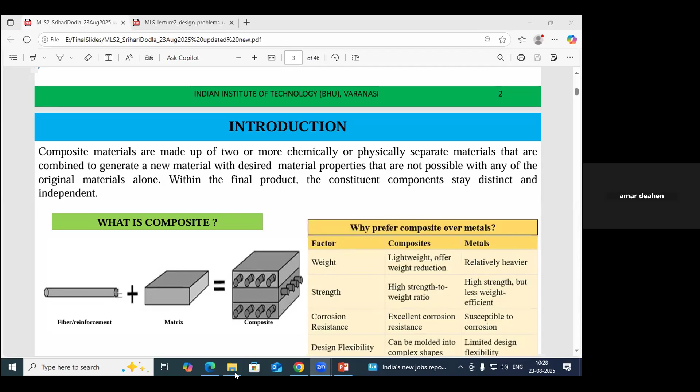Similarly, you can take the hardener, and for the container you can set it to 0 weight, and then you can add 12 grams. You can keep it aside. Now, knowing how much percentage of CNT you want to add, 0.25 percent, that is coming to 0.33 grams. You can measure 0.33 grams in the weighing machine and add it to the epoxy resin slowly. And then once you get a uniform mixture, after 2 to 3 minutes, you can add the hardener.

Once you add the hardener, stir it for a certain time, and then you can keep it on a flat surface with something like a plastic sheet, and to make sure it does not adhere to the plastic sheet, you can apply a silicone gel coating, and then you can pour your mixed resin onto that, and then check whether there is any kind of bubble formation or void. You can remove them by keeping it in the furnace, or you can also remove the bubbles with the help of some kind of sharp tool, like a pin.

So once it is cured after 24 hours, now you are ready with the composite material. You can cut this composite material as per the ASTM standards of the different testing experiments. Let's say for the tensile test, you can cut a sample of length 120 millimeters, width of 12 millimeters and thickness 4-5 millimeters. And then you can use that sample for the mechanical testing.

Similarly, for the other tests, 3-point bend test, interlaminar shear strength and impact test, there are separate dimensions as per the standard. You can cut the sample and then you can straight away test it.

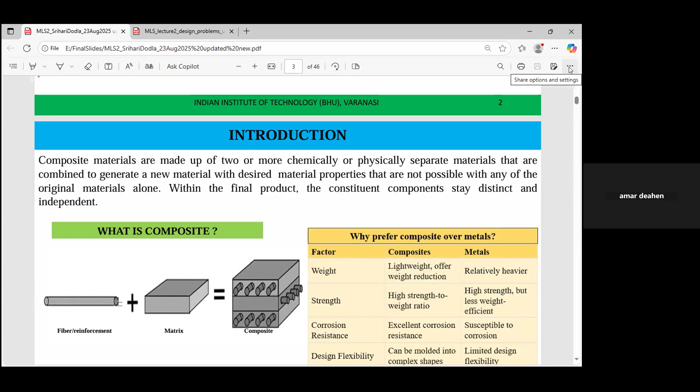Let's say, when we are preparing some food item like poha or khichdi, you have different ingredients in that. You cannot call that a composite material, right? Because microscopically it has to mix with proper distribution. There should be compatibility between the fiber and the matrix, so that you can call it a composite material.

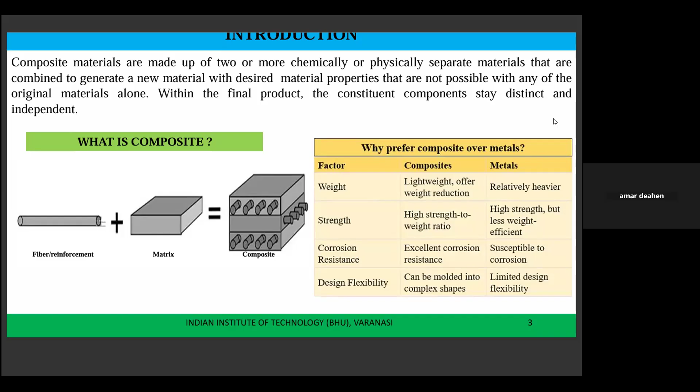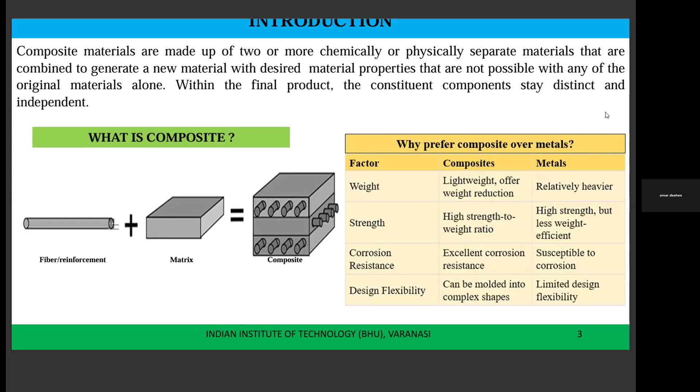So in this particular figure, you have a unidirectional fiber, and you also have a matrix. Say we want a certain volume fraction, 50% fiber fraction. We can keep it layer by layer, and we have to see, for adding one layer, what should be the fraction of the fiber. You can use the burn-off method to evaporate the epoxy, and then you get the fiber. From that, you can measure the weight. So you can increase the layers and see how many layers are required to get that particular thickness, 4 mm, 5 mm.

So in that way, you can increase the volume fraction for the fiber case, whether it is woven or unidirectional. But in the case of particles, you have to measure at the beginning itself, before mixing in the epoxy. So you can go from pure epoxy without any particles, and then add 0.25%, 0.5%, like that. You can increase the fraction of the particles and see whether you are getting the desired properties, whether strength, stiffness, or a reduction in the coefficient of friction or wear rate. You can check all those properties, because at the end of the day you are giving some kind of product. It should be useful, less costly, and lightweight.

So composite materials have advantages compared to metals. The first thing is weight. There is a weight reduction, and they have a high strength to weight ratio. If you keep a constant volume and compare both cases, metals and composites, you will see a high strength to weight ratio for the composite. Composite materials also have very good corrosion resistance compared to metals.

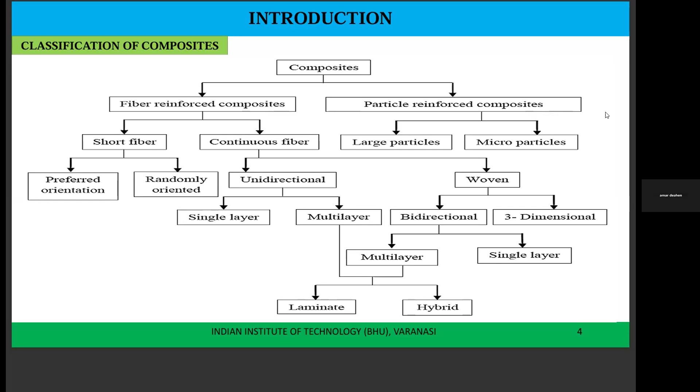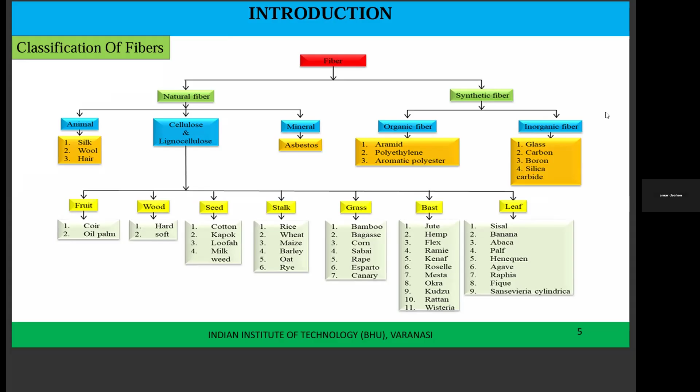So it is based on which application, and whether the property is strength or stiffness, or something like reduction in the coefficient of friction, or specific wear rate you are looking at, whether the wear has been reduced. So you have to choose the fibers accordingly from the application point of view. Next slide, please.

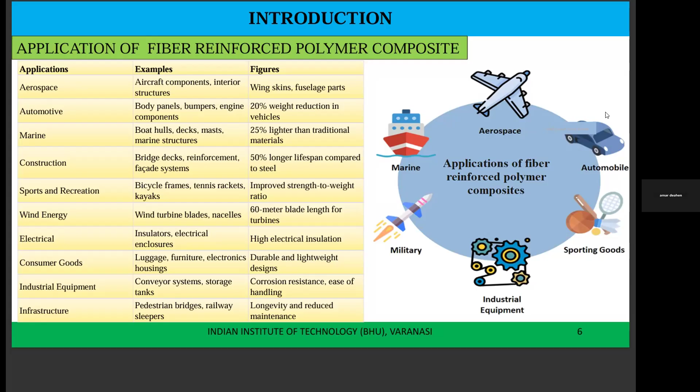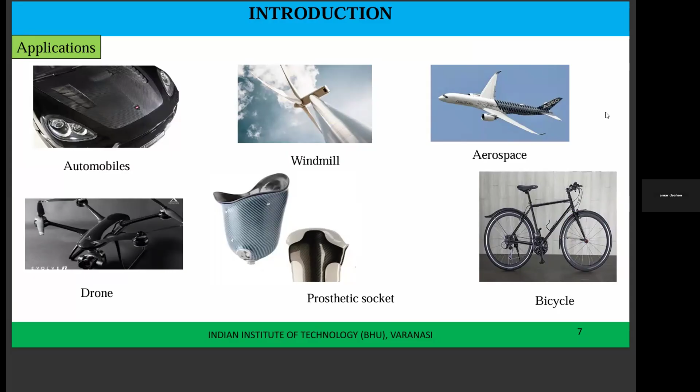So in this, some of the objectives, in terms of enhancing the properties, how we can enhance the properties. One possibility, by increasing the composition, we can enhance the properties. It may be strength or stiffness, or it may be a reduction in the coefficient of friction. Another possibility is modification of the surface, because when you are purchasing the fibers, they already have a certain coating for easy handling or movement from one location to another. When you give some kind of chemical treatment, with acid treatment or base treatment, you can see that oxidation will happen, and the properties will enhance.

So modification of the fibers by coating with CNT, carbon nanotubes. It is black in color. You are going to get single-walled or multi-walled carbon nanotubes in the market, and you can use different compositions depending on the application point of view.

And if you want to look at the micro level, what happens when we say properties are enhancing, is there any correlation with respect to the microstructure? What kind of wear is happening, and how is the distribution of the fibers as well as the matrix at the lower length scale? That is also interesting. For that, scanning electron microscope and FTIR analysis, Fourier transform infrared spectrometry analysis. In this FTIR analysis, you can see whether any hydroxyl or carboxyl groups have been formed. It says that the coating has been functionalized, and you can expect enhanced properties in this case.

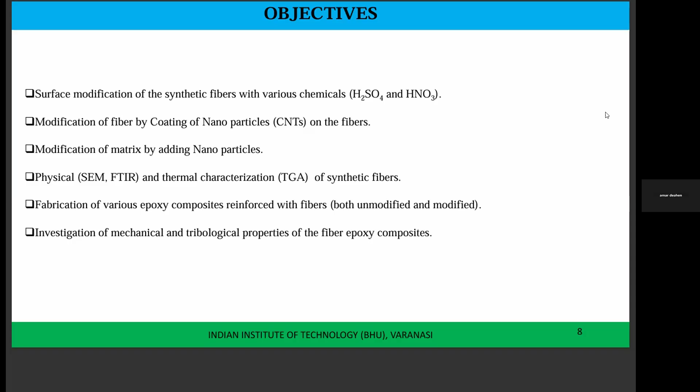So we are working with different fibers. One is glass fiber, which is less cost and has sufficient strength, and also carbon fibers, which have better strength compared to glass fibers and a very good strength to weight ratio. And to look for impact applications, we shifted to aramid fibers, which have more strength compared to carbon fibers.

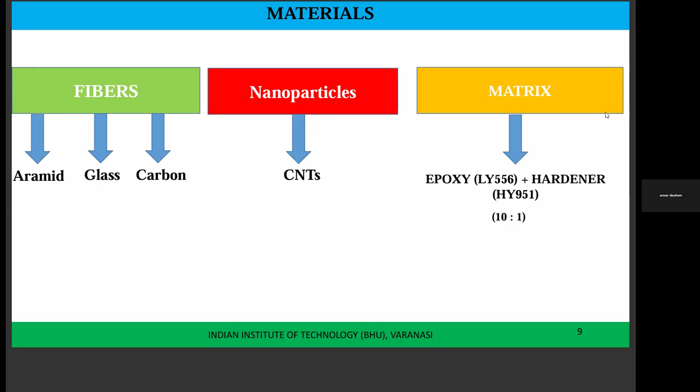For nanoparticles, we are using CNTs, multi-wall carbon nanotubes. Depending on the particular application, we are looking for enhancement of the properties. Coming to the matrix, we are using epoxy LY556 and hardener HY951. If you change this particular grade, you have to change the mixing ratio, 10:1; based on the grade you have to fix how much percentage of epoxy and how much percentage of hardener has to be chosen. Next slide, please.

So for example, for one fiber case, we are going to see how we can enhance the properties. The first one is aramid fiber. As I said, we get these fibers in different sizes in the market, and you have to choose a proper cutting operation to make small pieces like 15 centimeter by 15 centimeter, depending on the size of composite you are going to fabricate. And you can choose how many layers, 3 to 5 layers, 6 layers, depending on the thickness you are looking for, and also based on the volume fraction.

For the chemical treatment of the fiber as well as the CNTs, in this particular case we have used acid treatment. If you are going for natural fibers, there is an option of base treatment as well: sodium hydroxide, silane, and other treatments are also possible. For this particular case, it is an acid treatment. Sulfuric acid and nitric acid have been used in the ratio of 3:1. And then dispersion of these CNTs in acetone.

So basically, we want to oxidize the surface and make sure of forming the hydroxyl as well as the carboxyl groups on the particles or fibers. Then you go for dip coating of the fibers in the CNT and acetone solution. Next slide, please.

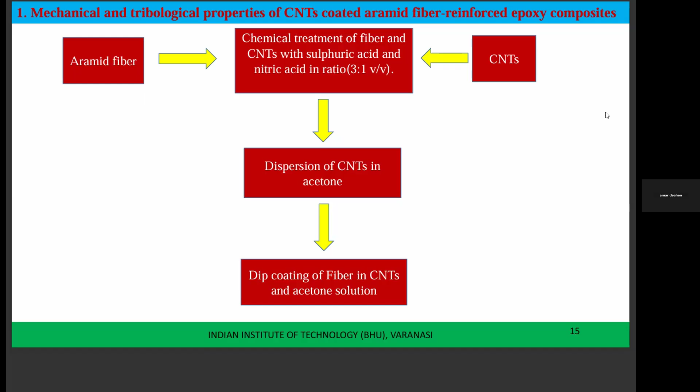So you get the coated aramid fiber, and you can also check whether the functionalization has been formed or not by using the filtrate pH values, whether it is neutralized after the coating. Once you have these coated fibers, keep them aside, and for the epoxy and hardener, you choose based on the size you are fabricating. 120 grams epoxy and 12 grams hardener will make a 10:1 ratio.

For your fibers, you can choose about 3-4 mm thickness, with 5-6 layers of aramid fibers. Since you have the coated, functionalized fibers, you can check with a small strip of uncoated and coated fiber using FTIR analysis, which will show whether hydroxyl and carboxyl groups have formed, indicating functionalization. Now you can expect proper bonding and sufficient strength or enhanced properties.

So you can go for the hand layup process, adding a uniformly distributed load on the surface, and cure it for 24 hours. Once the composite is ready, as per ASTM standard, you make markings for about 150 millimeters length, 15 millimeters width, and 4 to 5 millimeters thickness, then cut it, and smooth the edges with a grinding wheel tool.

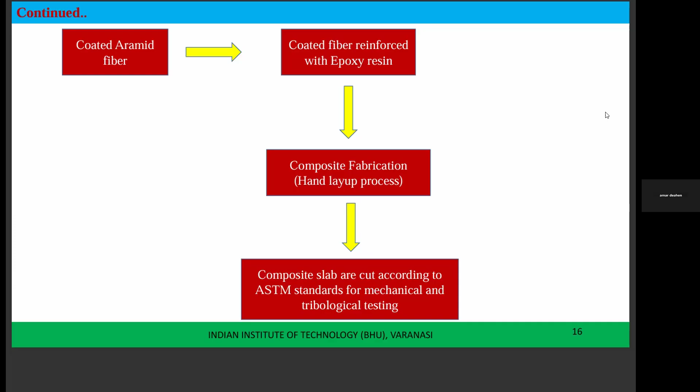Once it is flat, you can take that specimen to the tensile test machine to perform the tensile test, 3-point bend test, or interlaminar shear strength test.

Coming to property enhancement, one option is to increase the composition, but there is a limit up to which percentage we can increase it. Beyond that, even if we increase it further, there is a possibility of agglomeration and the properties will reduce. The other option is to go for modification of the fibers as well as the matrix.

For the aramid fiber, functionalization has been done with the help of acid treatment, using sulfuric acid and nitric acid in a 3:1 ratio.

We can perform FTIR analysis taking a small strip of coated aramid fiber, and also a small strip of the uncoated aramid fiber, and perform this FTIR analysis. From that you see transmittance as a function of wave number. In the first image, the uncoated one, certain groups are there. The second one is the chemically treated one. The only difference is an OH peak at 3445 wave number.

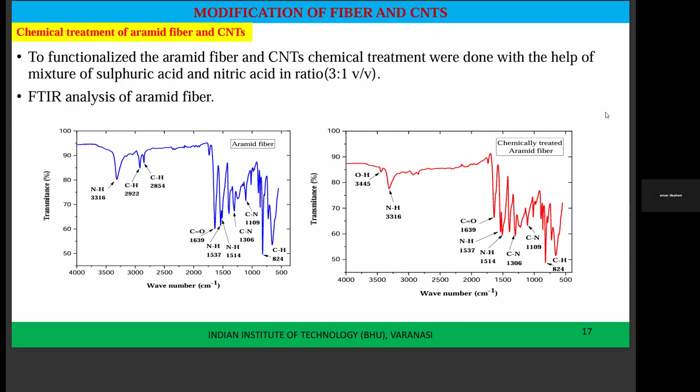If the hydroxyl group is already present before coating, that value will increase for the functionalized fiber; if it's not there, it will form. In this case, the left-side image, the untreated aramid fiber, shows no hydroxyl group, but in the second image, a hydroxyl group has formed. This means it is functionalized, there is proper bonding, and it is oxidized, so you can expect enhanced properties.

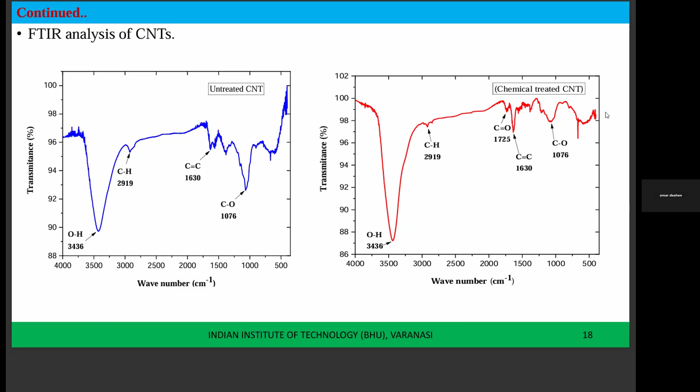Coming to the SEM analysis, we've established that coating and functionalization have taken place based on the FTIR analysis. Is there a way to visualize at the micro level how these fibers or coated particles look?

You make a small specimen, about 1 centimeter by 1 centimeter or even 0.5 by 0.5 centimeter, cut it and clean the surface with acetone. Then place it in the microscope and ensure that electrons flow; if not, you add some silver solution so electrons will flow. Once the specimen is set up properly, you can select the region with the fibers or particles.

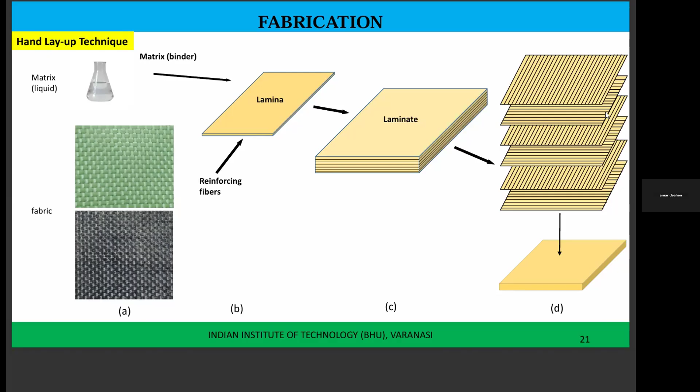So the laminate structure can be constructed keeping the same orientation, or you can rotate the laminate. For the first layer 0 degrees, second layer rotate by 90 degrees, third layer 135, fourth layer 180 degrees. So you can orient and look at the stacking sequence and whether there is any effect on the enhanced property.

Next slide, please. Once you arrange this, you can go for fabricating the composite and then curing. After curing, you get this polymer composite.

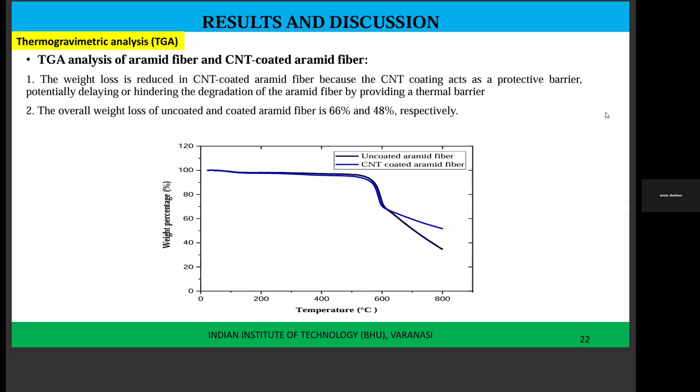After 600 degrees Centigrade, the uncoated fiber's weight percentage decays faster, but the coated one takes sufficient time before decaying. So weight reduction is less in the coated case compared to the uncoated one. Next slide, please.

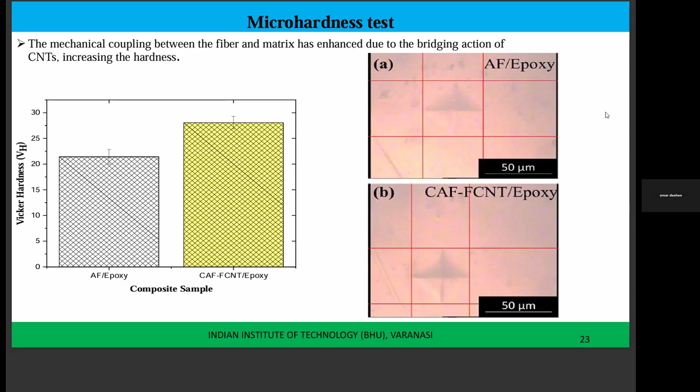Coming to hardness values, as properties can be increased, you can use the Vickers hardness test or other hardness methods. You choose a specimen of 1 centimeter or 2 centimeter by 2 centimeter, and measure hardness before and after coating. You see an enhancement in hardness values after coating compared to the uncoated specimen. Next slide, please.

Coming to the tensile test, we use an Instron machine with different load capacities: 50 kilonewtons, 25 kilonewtons, and 10 kilonewtons. Specimens are prepared as per ASTM standards, and since it's a composite material, for holding the specimen at the grips you need some friction-reduced or friction-free material. If there is friction, you have to multiply your load value by the coefficient of friction when taking stress-strain data.

If you don't consider edge effects and want to avoid friction, you can use Teflon or some protective sheets to ensure there's no friction at the edges. We keep the specimen between the fixtures and use an extensometer for measuring deformation, and you see failure after a certain deformation.

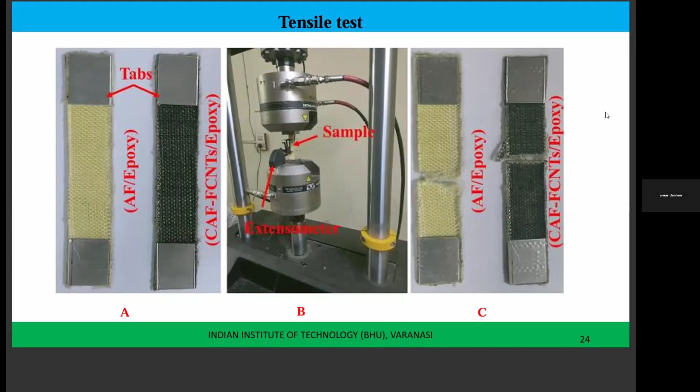Next slide, please. This is for the tribological test, using a reciprocating wear test. For this setup we take a specimen of 2 centimeters by 2 centimeters and thickness 0.2 centimeters.

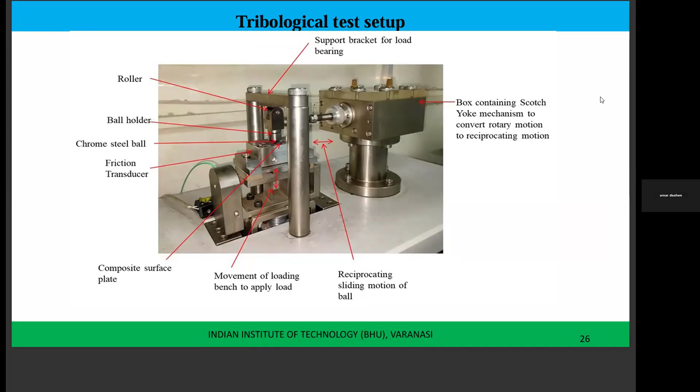You have a motor having rotatory motion, and it will be converted into reciprocating motion. You have a hard steel ball at this location, made up of chromium, and the specimen is kept below that, tightened with a screw. Once it is fully tight, you can set the load you want to work with, whether 20 newtons to 100 newtons, the temperature at which you want to operate, and how many cycles or frequency you want to operate.

This information you can give using the control box, and then from the data software you get the information of coefficient of friction and also wear rate, or you can measure the specimen before performing the test and how much weight it has after the test. So you measure the weight, and you get the information of the weight difference.

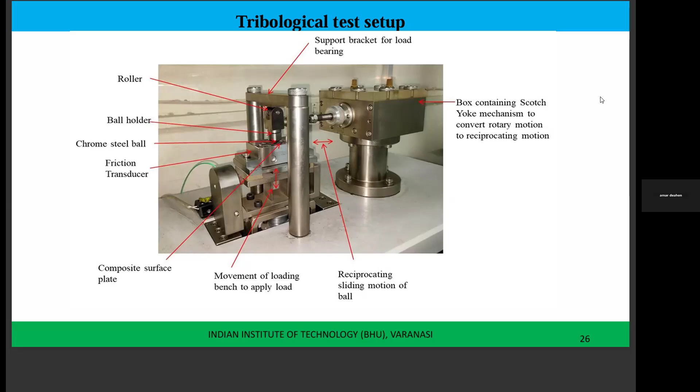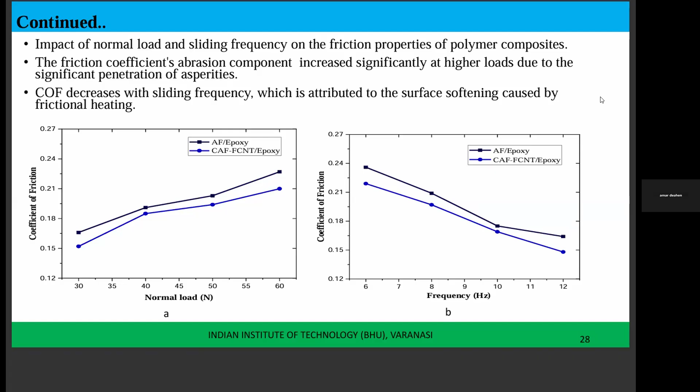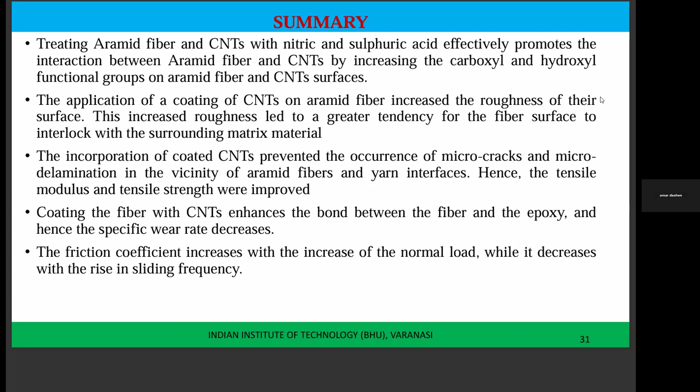When we treat the fibers with aramid and also CNTs, there is an enhancement in the strength, and also a reduction in the coefficient of friction and a reduction in the specific wear rate. The friction coefficient increases with increase in load, but decreases with the rise in sliding frequency.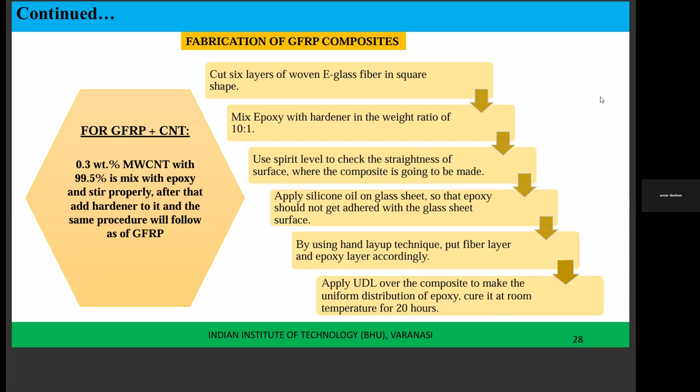CNT based polymer composite. And if you want to use it for the e-glass fiber, you can mix it with the epoxy and hardener and pour it layer by layer on the glass fiber. Once you prepare this composite without any pores or voids, you can add a uniformly distributed load, something like 30-50 kilos, and then cure it for a certain time. You are going to get the polymer composite. Next slide, please.

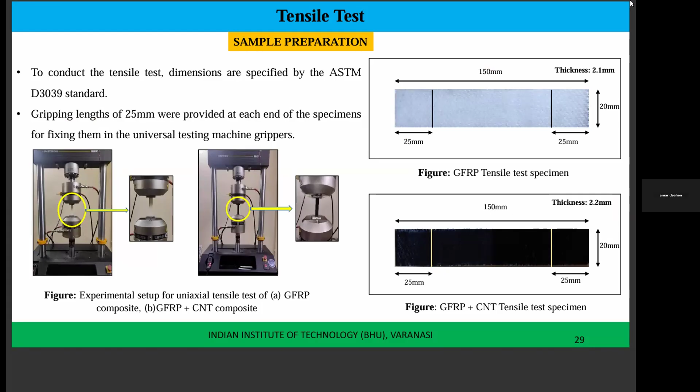So we have used the same procedure as for the aramid fiber composite for the glass fiber polymer composite as well. Next slide, please. We have compared the pure glass fiber based polymer composite with the glass fiber with multi-wall carbon nanotube mixed polymer composite, and we can see there is an increase in the tensile strength and also an increase in the stiffness, tensile modulus. Next slide, please.

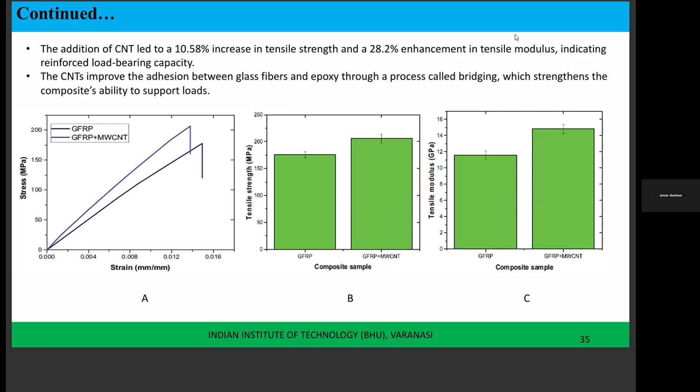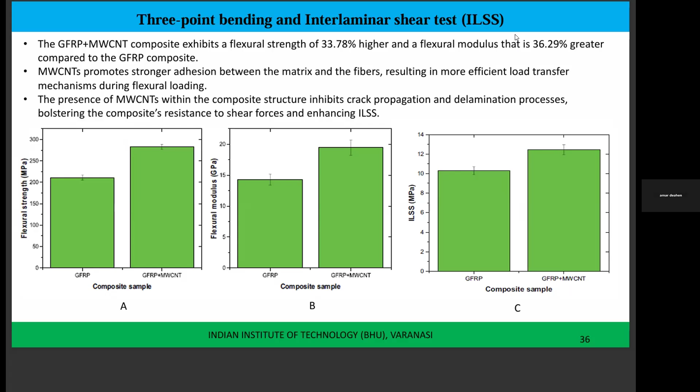So we have also performed the 3-point bend test. Whatever specimen dimensions you have taken for the tensile test, the same dimensions should be fine: 15 centimeter by 2 centimeter by 0.21 centimeters. You can take those specimens for the 3-point bend test. You change the fixtures, the top platen and bottom compression platen or the tensile fixtures, replace them with the 3-point bend test fixtures and apply the load. You are going to get the flexural strength for both composites, and also flexural modulus and interlaminar shear strength as well. Next slide, please.

So we have also studied the impact. Is there any effect on the impact? We have the impact machine and the possibility of Izod and Charpy impact tests. As per the ASTM standards, these are the dimensions for the two different test cases, and you can perform the impact test, making sure that initially it is calibrated to zero value, and then once you release the hammer, you can see the energy rise. That value gives the impact energy. Next slide, please.

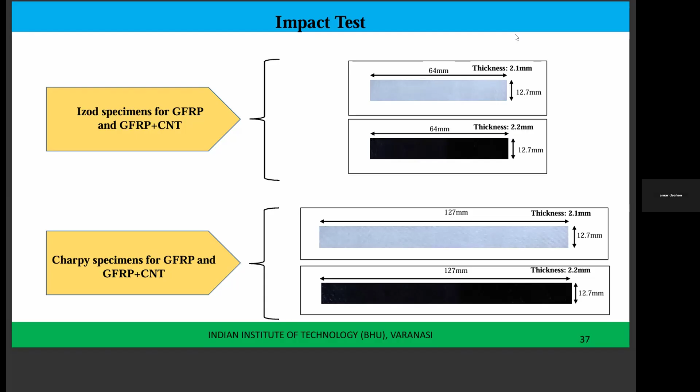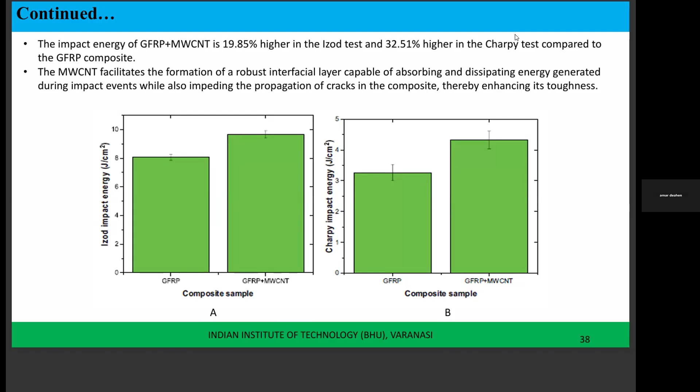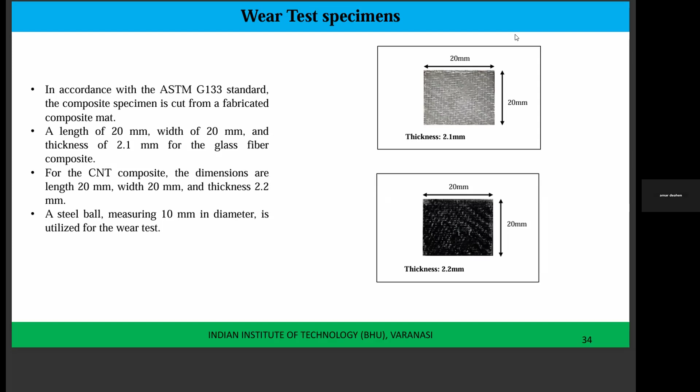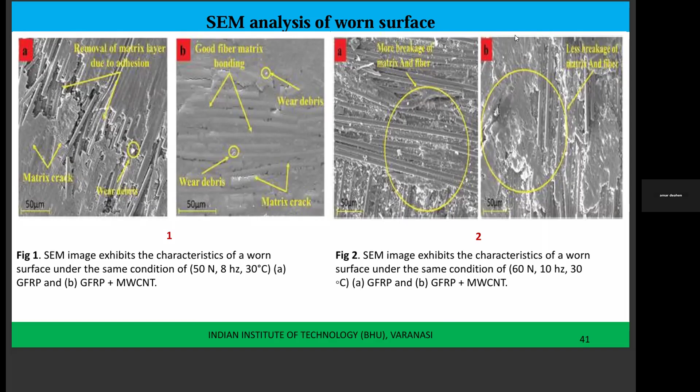So when we are doing experiments, for the future we need some kind of design data. For that you have different options: you can design analytically, numerically, or with machine learning and AI. We have information on the fibers, the load, frequency and temperature, and from that we find the coefficient of friction. So why can't we take those test parameters as input layers, construct the function, and from that function optimize the coefficient of friction value? Then with the model, when you change the input parameters, the fiber percentage, load, frequency and temperature, you can straight away say what the coefficient of friction should be. No need to do any experiments. Next slide, please.

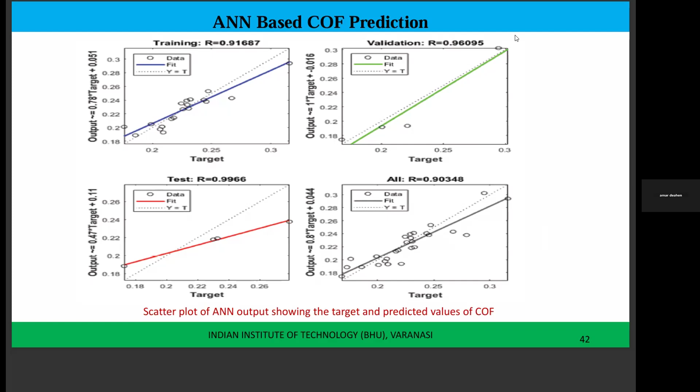So in summary, you can see that there is an enhancement in the tensile strength as well as the modulus, and also flexural strength and modulus can be increased for the mixed coated multi-wall CNT particle-based polymer composite material.

Also you can see there is an impact energy increase, both from the Izod as well as the Charpy test. For the coated one, you can observe less debris and also less fiber breakage, because you are getting the increased strength. That means there is some kind of bonding at the lower level, so very less breakage you can expect.

So one tool, an ANN tool, has been developed so that rather than doing repeated experiments, you can simply choose the data from the user side and find out the coefficient of friction value.

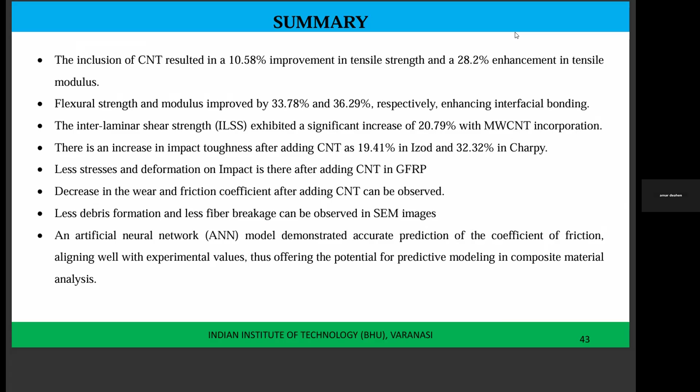Now I will go to the design competition, and after explaining that, I will take the questions. Can you go to the next file? Can you close this and go to the next slide?

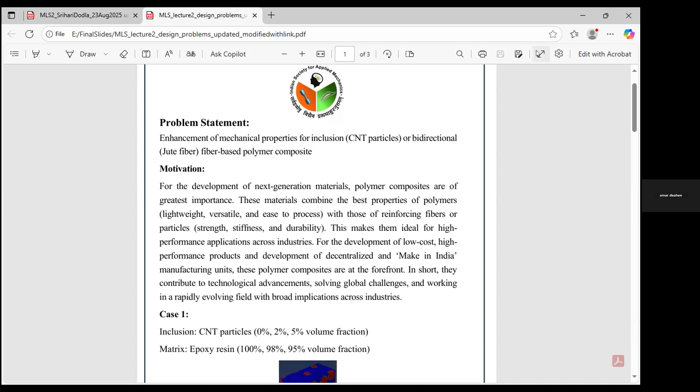Okay. So coming to the design statement, you have seen that there is a possibility of property enhancement. Property enhancement is possible when you add the second material onto the first material. So how much increase can be expected when you add the second material? This is interesting, because from the application point of view, everyone looks that the design should be better compared to the previous materials.

If you want to replace something, it has to have better performance compared to the previous one. If you want to replace metals and alloys with the composite, you have to clearly say what the advantages are: specific strength, increased hardness, increased tensile strength, better stiffness, like that.

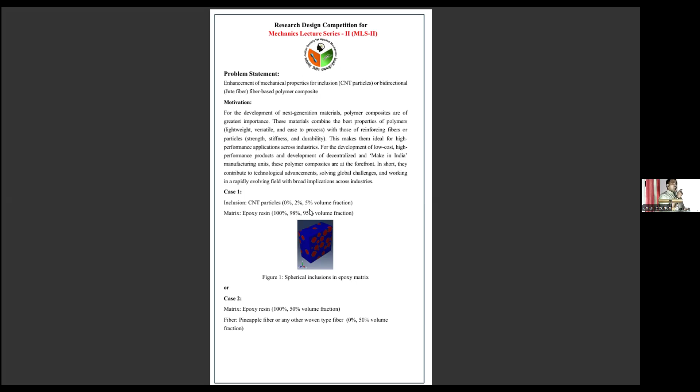When you are going for the addition of the second material, you have a possibility of adding nanoparticles. When you look at the micro level, can you remove that full screen mode so that I can show them? So when you add these nanoparticles, they are in spherical shape in the polymer matrix. When purchasing these nanoparticles, you get the information of the diameter or the radius.

And as I already said, when enhancing the properties, you can add this second material, fiber or particle, with a certain volume fraction, whether it may be 0.25%, or 1 or 2, based on what size you are constructing. I want to construct a 15 centimeter by 15 centimeter sheet. For that, I know how much epoxy has to be added: 150 grams epoxy and 15 grams hardener.

And for this, let's say you go for one weight percentage of CNT, you multiply with the total weight, and from that you get how much weight of CNT you have to take. Maybe 0.33 or 0.5 grams, whatever it may be, you take separately. And you can measure your container, plastic cup, or whatever holder you are using, set it to 0, and pour your epoxy based on the size of your plate.

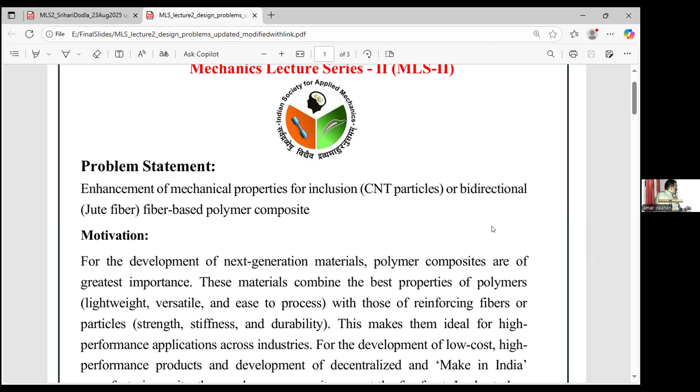So the idea of this design competition, especially for undergraduate students, is from a design point of view, like when you are fabricating something and when you are simulating things, and you are going to go in the direction of a startup or some kind of innovative projects in future. There is a lot of funding in the institutes, IITs, NITs, and the government is supporting new ideas. Based on what your idea is and whether you have sufficient skills or not, you can go for a startup.

And this will give you some kind of foundation on how to fabricate, how to perform the test, and how you can compare with other models, whether analytical, numerical, or other machine learning AI based approaches. So you can see here, this is one cubical geometry, and the blue color one is epoxy with hardener, and you also have a CNT. CNT, as I said, is a spherical shape. Based on how much fraction you are going to get, you can construct that much size. You have different options.

There is a finite element simulation tool. All the packages give a student version, so free. You can straight away give your institute credentials, and then you can download that particular software. Abaqus is one of the good software. You can download that. In the backend it's finite element programming. It is user friendly. You have to construct your geometry, and you have to assign the properties to that particular

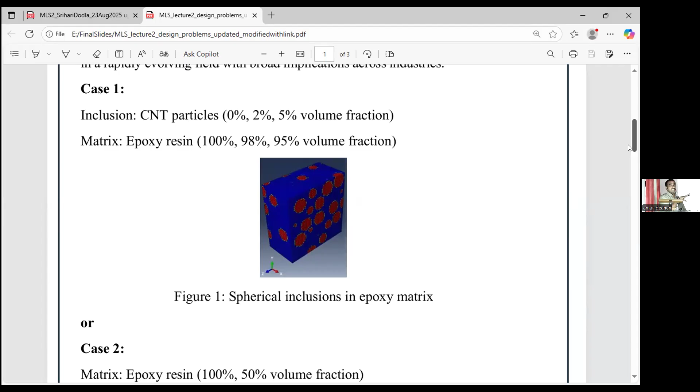geometry. You have to give the material model, and once you fix the boundary conditions, like how you are doing in the UTM machine, fixing at one end, applying the load, stress free at the boundaries, you are going to get the stress strain behavior. From that you can find out the strength as well as the stiffness value. Whatever values you are getting have to match with the experiment.

So for that, either you can make some kind of empty regions, construct the spherical shape particles, and then assemble both, or you can take control of the integration points, that is nothing but the material points, and construct the spherical geometry surrounded by the remaining portion with the matrix region.

So for this, if you take pure epoxy, that means there is no fiber, no spherical inclusions, you are going to get the complete blue color box. When you perform the tensile test, you are going to get the strength, stress strain behavior, and also the stiffness value. Now in the second simulation, you can add 2% volume fraction, and then see whether the strength is increasing compared to the value you got for the pure epoxy case.

Now you have added inclusions, so there are interface effects. The properties have to increase. Then you increase from 2 to 5%. By 2% spherical inclusion I mean the remaining 98% should be matrix, epoxy. The next one increases further to 5% volume fraction of spherical inclusions and the remaining 95% matrix. In this case, check whether the strength is further increasing or not. This kind of analysis you have to do in the first problem.

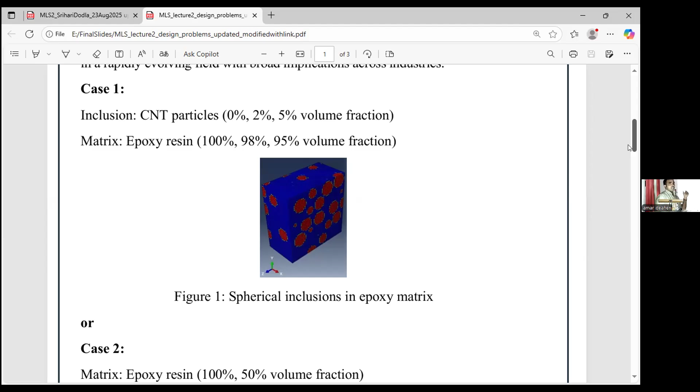Can you go down now? So the other option: you have two cases. Either you can choose the first case or the second case. The second case is a kind of woven type fiber.

You have fibers along the horizontal as well as the vertical direction. You can see that yarn information. What is the fiber diameter? So after having these fibers, like natural fibers or whatever the fibers, it is freely available at a low cost, and you can take a photo of that, and then you can take it into any open source image tool, and then you can convert from your units, millimeter scale, to pixels, and then you can measure that particular region.

You are going to get the fiber diameter, yarn width, gap width, yarn spacing, and fabric thickness. All this information you are going to get. For this particular pineapple fiber, I have also given the properties. So once you have the information of the fibers, now you can construct this kind of structure, a wavy pattern. You can use any kind of design tools, CATIA, CAD, AutoCAD, SolidWorks, and then construct one wavy pattern, and then go for the mirroring option. You are going to get as many as you want. Similarly in the other orientation.

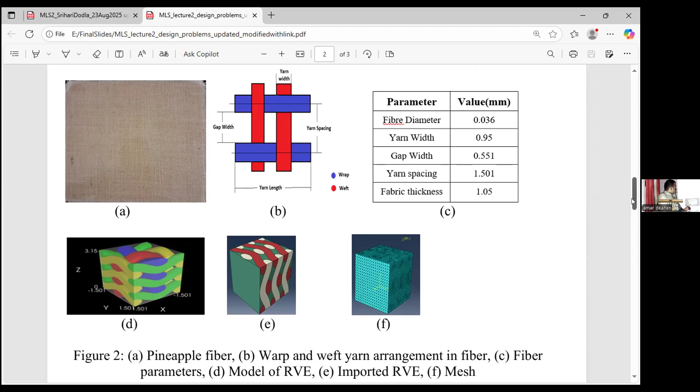So properties of the composite constituents have been given for this pineapple fiber. You can also choose any other fibers. Those properties are already available either in the technical sheet when you are purchasing, or in the literature. And for CNT particles and the epoxy matrix, you also have the properties. And your task, can you go down?

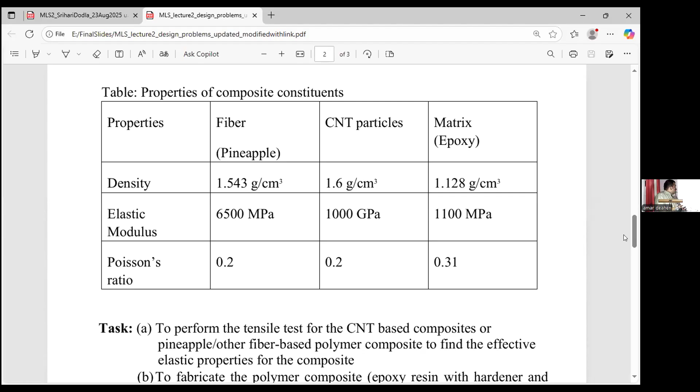Your tasks are to perform the tensile test for the CNT based composites or pineapple or other fiber based polymer composites to find out the effective elastic properties. We are saying that pure fiber has a certain strength, similarly the matrix has a certain strength. For the composite, we are looking for the enhanced property in between matrix and fiber. So we can check the effective elastic property, whether we are getting higher stiffness and whether we are getting higher yield strength.

And the second task is fabricating this composite, either with the woven type fiber with epoxy matrix, or you can go for the epoxy resin with hardener and CNT nanoparticles. You can choose any one, and you can compare effective elastic properties for both cases. Either you can choose the first or second one with increasing volume fraction of fiber, whether we are seeing enhancement in the properties or not. Okay, so can you go down?

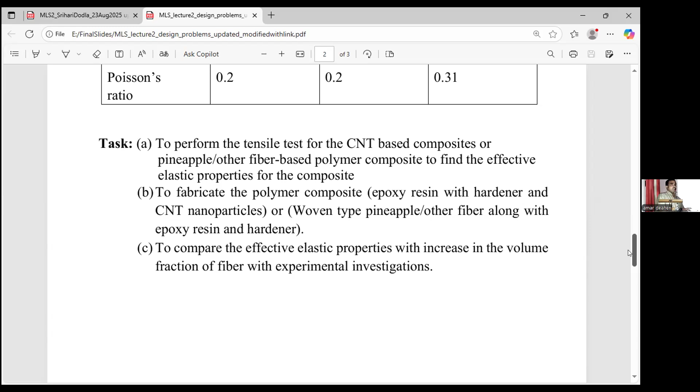So some of the instructions on how you have to submit your report. And a literature review: from where you got the information, references, any paper or Google search, whatever references you got, you have to make a literature review, and show the results of the above contents, either analytical or experimental. Analytical, experimental and numerical study you can compare. Analytically you can do it based on the rule of mixtures.

I have a matrix, and you add some kind of fibers, unidirectional fibers, something like that. So based on the rule of mixtures, the effective property is the summation of the product of the volume fraction of each phase times the property of that particular phase. If you have matrix and fiber, you take the volume fraction of the fiber multiplied by the Young's modulus of the fiber, plus the volume fraction of the matrix times the Young's modulus of the matrix. So you can compare experimental as well as simulation results.

And whatever conclusion you observed performing the experiments and numerical simulations, whether they are comparable. If yes, what is the percentage of error, if there is any, and what references you have taken, that also you have to mention. Go down, please.

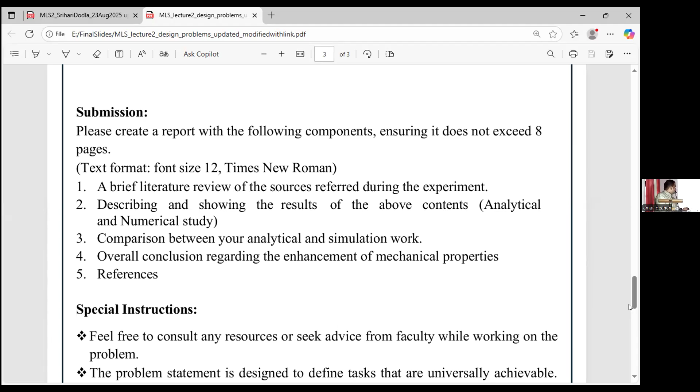So some suggestions: you can choose any kind of resources. You will get a lot of open source now. You can find it out. You have to give a report with all the above information.

So for the BTech students, we are targeting a team size of maximum 3. Only second year and third year students are allowed. In case first year students also want to participate, they have to consider the 2 team members from the second or third year. There will also be a Google form link. It has to be certified by the faculty in that particular institute, and only within that particular institute the students have to join, make a group, and then perform the task.

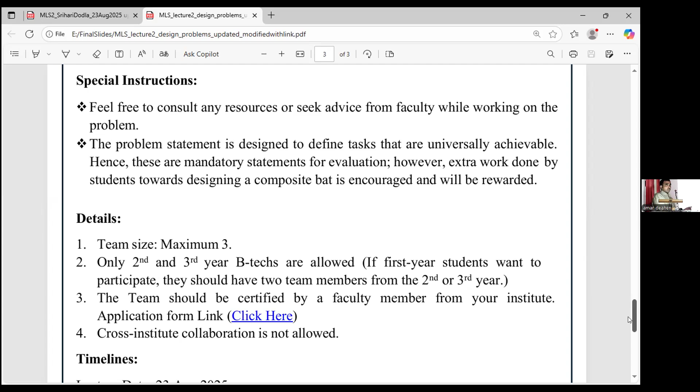Can you go down? So these are the draft timelines. Registration is going to close on 27th August midnight. For that, a Google form link has also been given. You have to submit reports including the literature survey by 21st September, Sunday. Shortlisted teams will be announced on 4th October, and the presentation of the shortlisted teams for the best design award is on 11th October. So these are some kinds of support we are going to provide.

So I thank you all for listening, and if there are any questions, I am happy to take them. Please. Any questions from the online participants or offline participants? Anything about this fabrication, enhancement, numerical part, or any other thing, especially for the design competition?

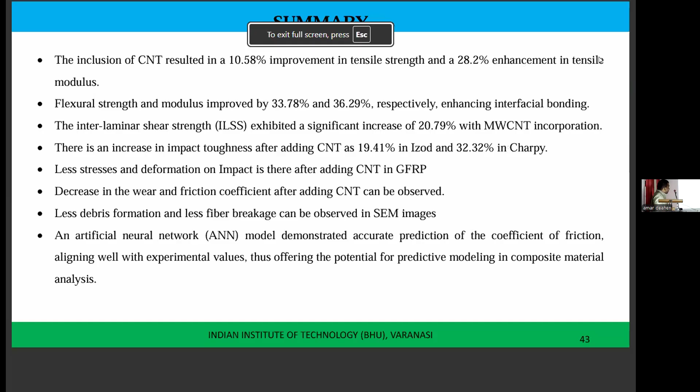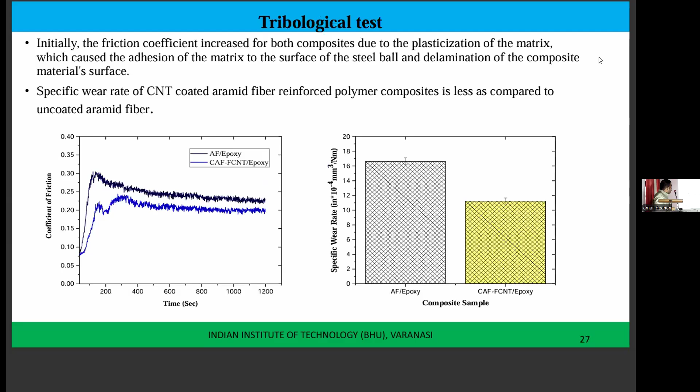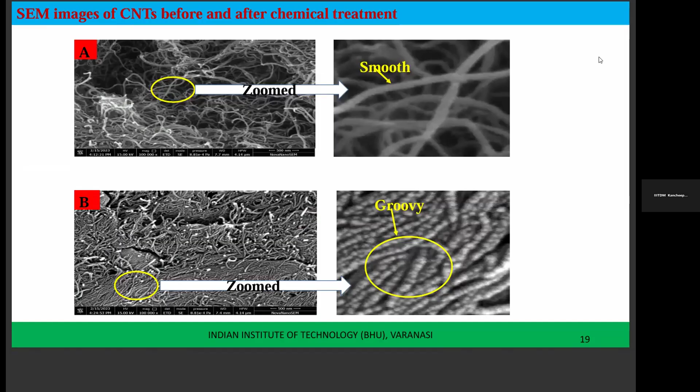Excuse me, sir. Yes, sir. This is Prasanna from IIITDM Kancheepuram. Can you go back to the slide where you had the SEM images of pre-treated and post-treated aramid fiber? Can you go up? Down, down. Are you talking about this slide? No, sir, just a bit ahead. Can you go up? About this one? Yes, that one. Can you go to the next slide, sir? The enhanced zoom, yes.

So my question is, when we talk about the fibers used for making the composite, and we're adding carbon nanotubes, the shape or size of the nanotubes and the general fibers are going to be magnitudes different, right? We usually have fibers that are woven together, considered as one fiber. Is this that, or is this an individual fiber in the size of micrometers?

Yeah, this is actually woven type fiber. The first image shows the initial fiber, and the second image is the functionalized one. At the micro level, for an individual fiber, the surface is smooth, but for the functionalized case you can see roughness. It is the same for the other fibers also. You can look at the scale, in nanometers. At lower magnification you can also see this roughness. It's a woven type fiber.

I'll just digress a bit. In vulcanization of rubber, at the molecular level, you have sulfur bonding with interlayers of the rubber polymers, a chemical bond. Is the same thing happening here, with cross linkages forming, or is it just surface treatment of individual fibers? I'm not able to understand how just increasing surface roughness, whether by van der Waals force or increased friction between fiber surfaces, gives better strength and toughness. Can you explain that a bit more?

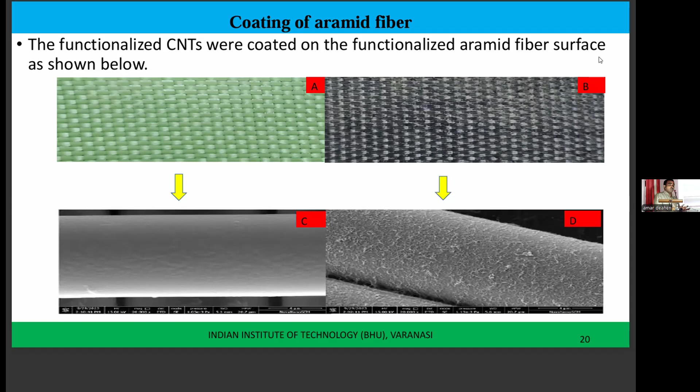The second point is why we are going for this polymer composite. Nowadays, all industries want to reduce size and space. They already have well established alloys or metal based structures for construction, but they want to go for something weightless. This is a starting point - we are doing it at small scale, but this design idea will help industry or the production team think about enlarging the application, like in doors or construction items, which will be replaced with polymer composites. The huge advantage is there is no corrosion resistance issue and no much maintenance. So labor cost also will be reduced. That is the advantage in this, sir.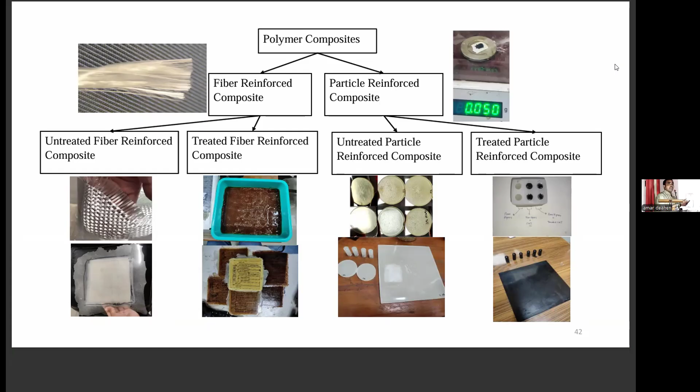Glass fiber, and also treated fiber reinforced composite, untreated particle. Can you hide that portion? I can also show, we have some kind of dies for making it, that's also available on Amazon or any online platform. You have a die something like 12 centimeter by 12 centimeter, you can straight away pour in it, making sure voids are removed, and there are no voids, then you can cure it for 24 hours.

Once it is cured, make sure it is not adhering to the bottom surface. You have to use some kind of silicone gel liquid so that it won't adhere to the bottom surface. Otherwise, if you didn't consider that, when you are removing it after curing, you are going to waste that mold. You cannot use it repeatedly.

For performing the compression test or tensile test, you can cut straight away from that particular plate, 15 centimeter by 15 centimeter, or 150 millimeters length and 15 millimeters width. The thickness you can choose based on the number of layers of fiber and the volume fraction of the particles.

So once you have this sheet, you can cut the specimen for the tensile test and go for performing the tensile test. I will also give some detail on that, can you go to the next slide?

Okay, so this is how it goes: initially you have a fiber, glass fiber, and the procedure is the same for other fibers. For natural fibers there will be dust particles, so you have to clean it with water, then dry it for some time at room temperature. Then you can cut the fiber sheets to the desired size.

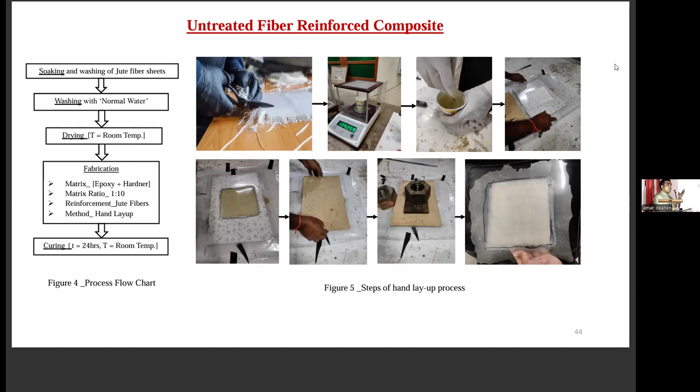Then add the epoxy measuring 120 grams and keep it aside. Similarly measure the hardener, 12 grams, and keep it aside. For the CNT particles or fiber, after cutting and drying, keep them ready. First prepare a plastic sheet, pour some non-sticky liquid on top, then add the fibers and epoxy resin layer by layer, using 3 to 5 layers. For natural fibers, three to four layers are sufficient.

But for artificial fibers like glass, carbon, or aramid fibers, you can go for 5 layers. Once you build it layer by layer, adding the epoxy resin, place a flat surface on top and apply a uniformly distributed load. After curing, you get the composite you were looking for.

Once you get that particular composite sheet, you can cut the sample based on ASTM standards, depending on which machine you have available and which ASTM standards you are following. A standardized size people use is 120 by 12 by 5, but you can also use other dimensions like 150, 15 and 4.

After performing the test, you get information on the deformation behavior, and from there you get the Young's modulus as well as the strength value. So in this way you can fabricate the composite.

Sir, did I answer your question? Yes sir, yes sir, thank you very much. Sir, are both epoxy and hardener also available on Amazon? Yes, yes, it is available. Okay sir, okay, thank you. Thank you, sir.